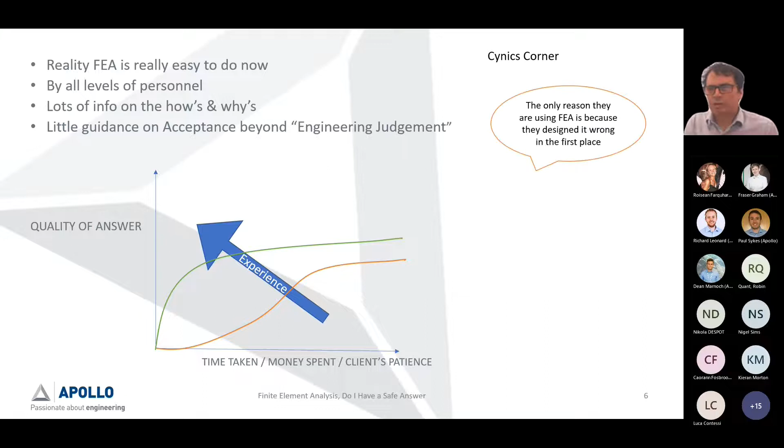FEA's got a bad reputation in some quarters - I call it cynic's corner - because sometimes if you're old school, you associate FEA with being hard and something you only do if you've got a problem, or something you've designed, put into service, and then gone 'oh, we're not very sure about this, let's do some FEA to reassure ourselves.'

The other classic statement is you never get a straight answer from an FEA man, because the FEA will raise more questions than answers. So if it's raising more questions, it takes more time, so it slows the whole process. Instead of doing a quick FEA to prove the answer, the FEA man comes back - have you thought about this? Have you thought about that? And everyone looks at you. That's really when the problems start.

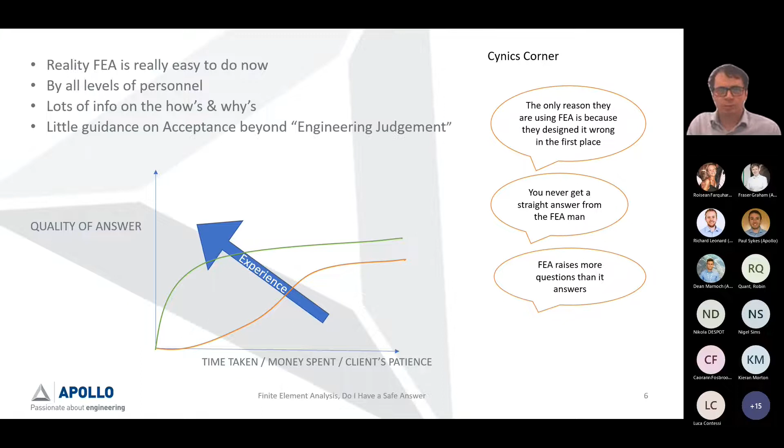So real life FEA now really consists of someone building a model, be it in Inventor, Creo, or SolidWorks, and either using the inbuilt package if they've got the professionals to do an FEA, or maybe passing the step file over to someone who's got one of the mainstream packages, converting it into a model. Then someone just says, okay, run it through the FEA package and tell us, is it safe to use? And there's your problem - how do we know it's safe to use?

I came up with a thought process to think about this. I'll take a little problem that's solvable by hand calculations, and then equate it to a little test model, and compare the FE and the hand calculations. I'm then going to take a few exploratory detours into some background stuff that helps understand why some limits are appropriate and why some aren't. Then I'm going to put my head on the block and suggest some limits that, if you're halfway sensible, you can live with, and no one's going to tell you off too much. Some people might disagree with my limits, but hey ho, you've got to put yourself out there.

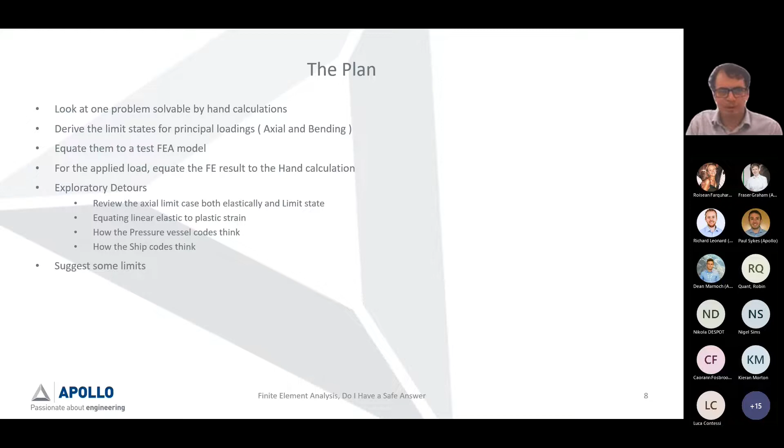So I'm making a basic assumption in this, in that I'm largely letting the software do its thing. I'm not worried about element choice. I'm not worried about meshing. I'm not thinking about the solution. All I'm doing is I built a model, brought it into Ansys, solved it.

And I think this is a valid assumption because I think that's how most people use these packages now. They don't want to burrow into 16,000 layers of click boxes, and remember to tick box X to do box Y. So that's what everyone's going with.

But the real important thing is you've got to think. You cannot blindly accept the FEA as it is. You have to think. You have to apply some common sense to what you're doing.

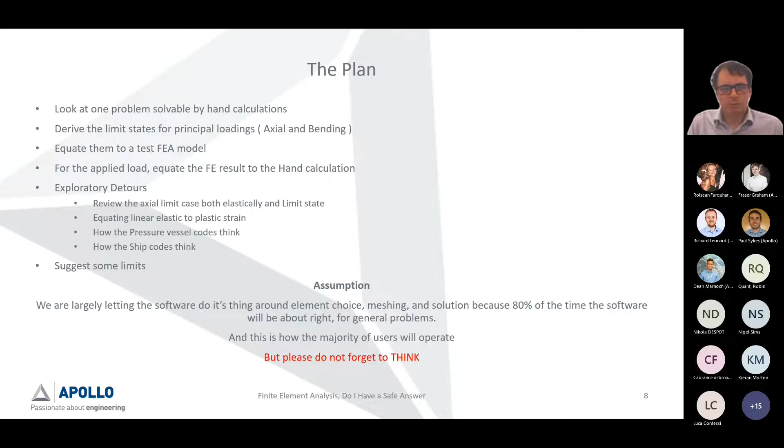So we're back to square one. How can we accept the results of an FEA? Even that question is open to interpretation.

What's the question? Are we confident that the loads we're using are accurate? If the loads are just a good guess, there's no point in doing a really top-notch FEA. You just want to know, are they there or thereabouts?

What design code do we need to assess against? If you're in aerospace, pressure vessels, or ships, you'll probably find very good, very detailed guidelines about what you need to do and what you can't do. But if you're in structures and just general mechanics, it's largely left to your own choices. So you have to work out what your limits are.

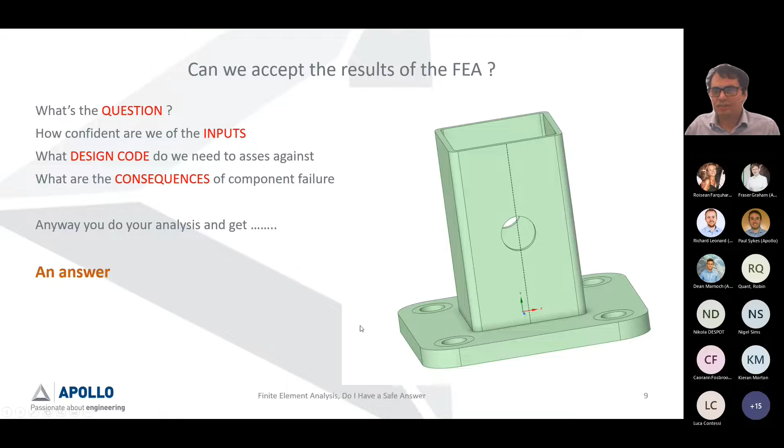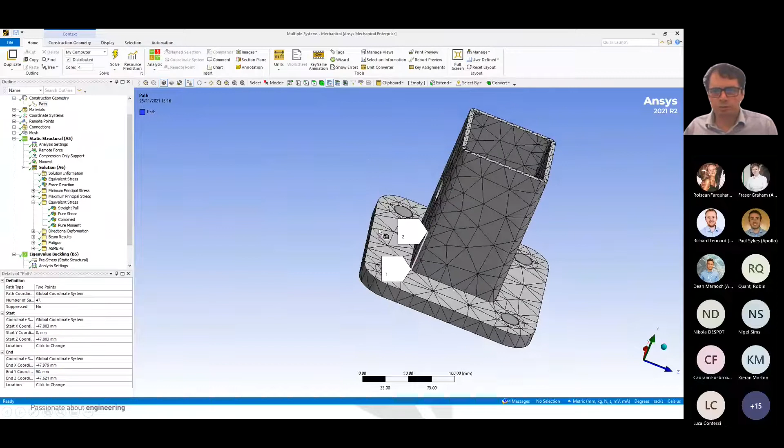For those of you who don't know Ansys, it's fairly straightforward. You bring your geometry in, you assign some materials, and you put some connections in. So what's my geometry?

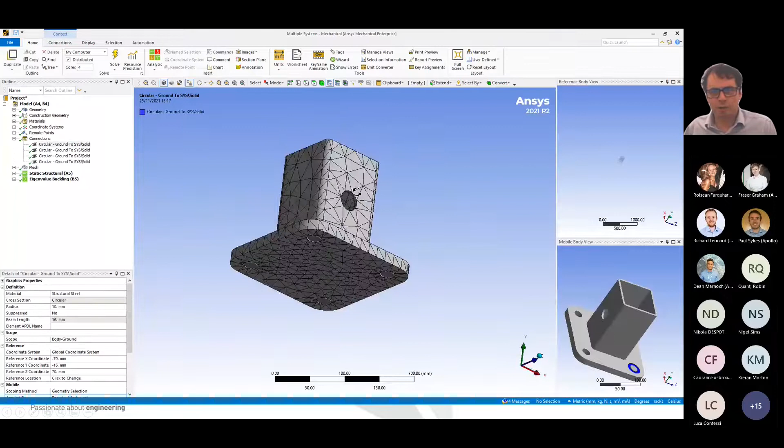In this case, I'm basically doing a bottom bracket of something that drops in, and here I've got a modeled bolted solution. So that's a wee bolt, and then we just tied the bolt to this area, and we've got 4 bolts. I'm not going to go into detail, this is just an experience thing of mine. This seems to be the nicest way. There's many ways you could hold this model.

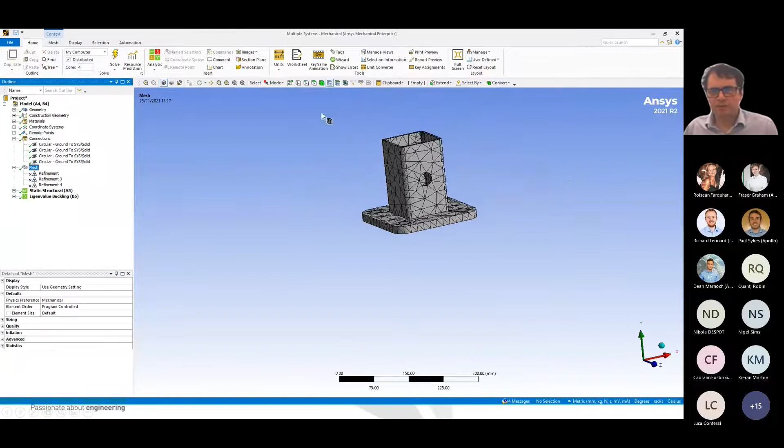You then get a mesh. This is Ansys's default mesh. If you just click mesh, that's what you get.

And then you need to apply some loads. You can see that I've applied the loads to this surface here, and I've got a few load cases. I've got a straight pull, I've got the shear loads, I've got a moment, you can't really see the little circle, and I've got a combined load.

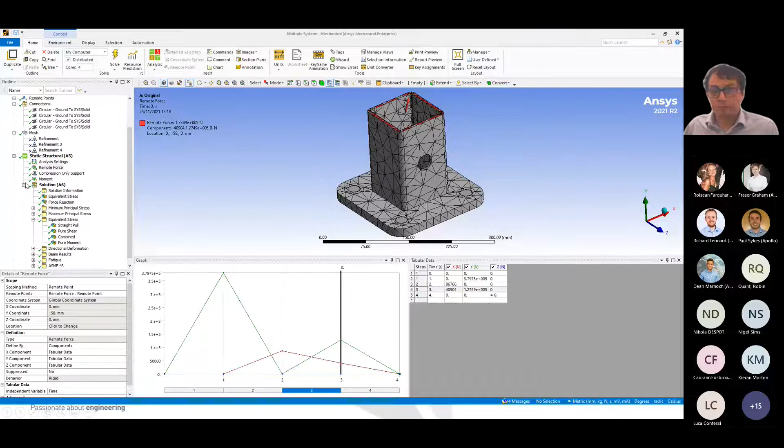So you apply all the loads, you get an answer. You solve it... and it's the wrong picture. So you solve it, and get rid of this. Okay, and you get an answer.

Now, the question is, do we know? The question I'm asking myself is, how do we know it's safe? The first thing you notice is, well, actually, maybe you would think that we're going to assume it's 355 steel, therefore yield is probably a sensible limit. So we could set that limit to yield.

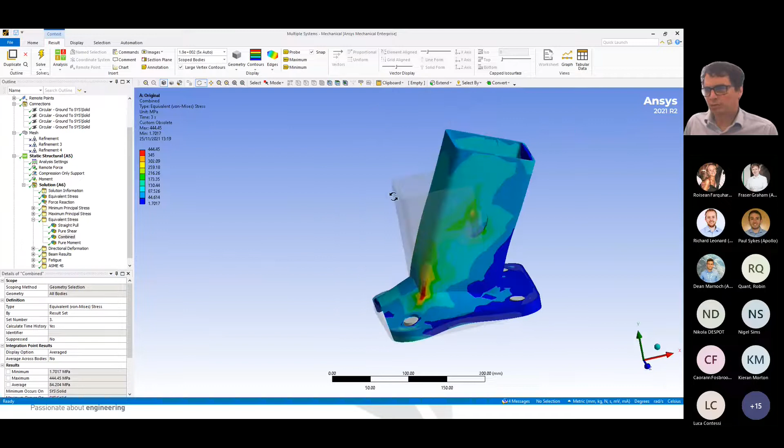So we've got some areas that are close to yield here, and we've got some obvious fails here, and you can see that I've put big excessive deformation on, and you can see that as a bending moment comes on, it's trying to bend it and rip it apart. This is all looking quite sensible.

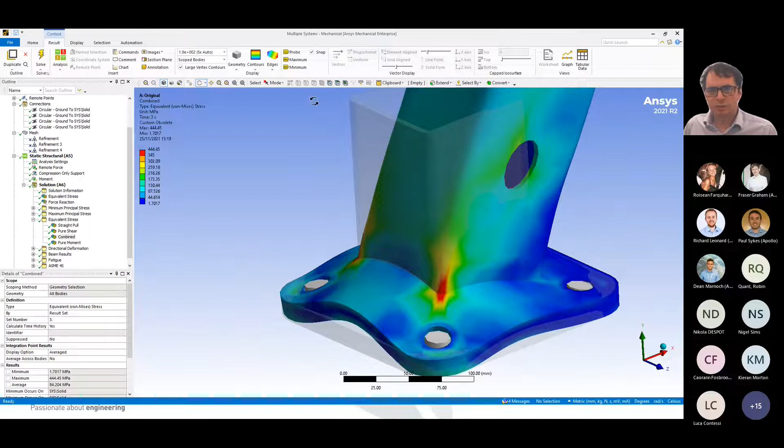You'll notice that how you present the results makes a difference. Quite often people see these nice blended plots. I don't really like them, because what you get is a blended plot, and crucially, this is very subtle, most software displays an average solution.

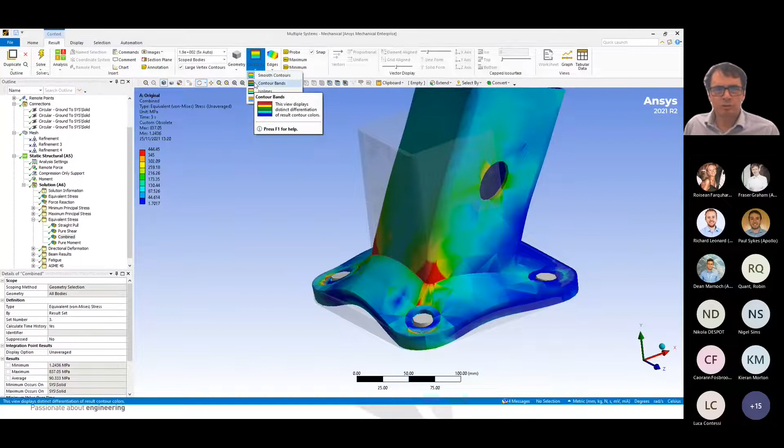And if I change that display to unaveraged and then reevaluate it, you can start seeing the picture is not quite so pretty. You see all these step joints, and then if we take the contours and put it to a bit more of that, you can see the elements, and you can see that the stress is jumping radically from element to element.

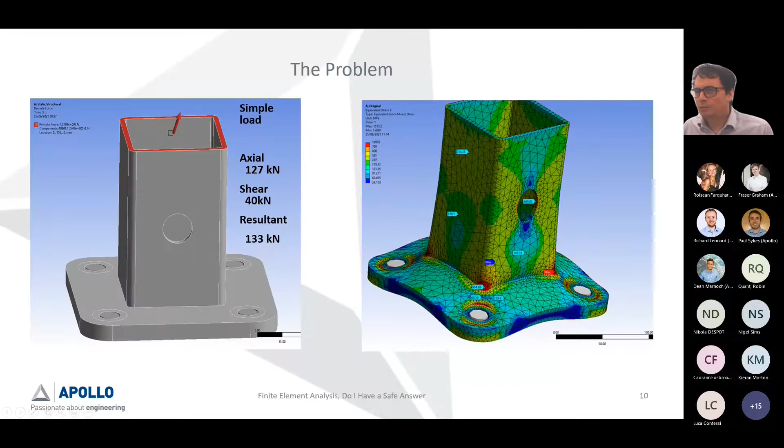So in my first pass, I'm not so comfortable with this mesh, so we'll throw away this model, bring in and put another mesh on, and you get a much nicer, much more complete picture.

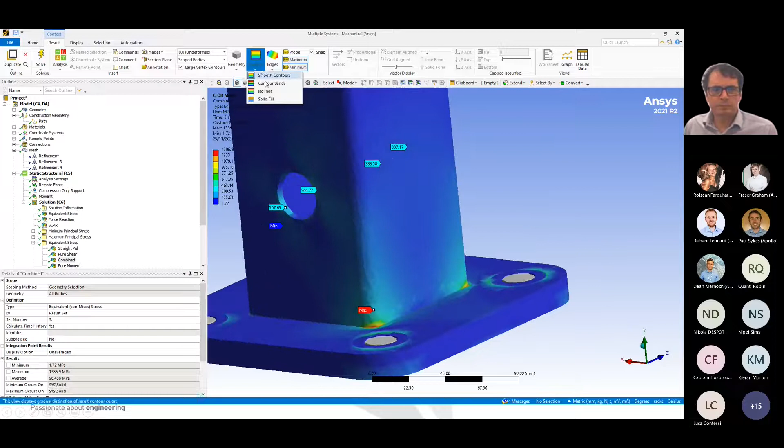Okay, and contours, put contour bands on. Again, I've got unaveraged plots now, but this time if you look at the mesh, you can see the bands are crossing the elements quite nicely. There's some glitchiness here, but that's probably livable with, and that's just down to the way I've held this pin.

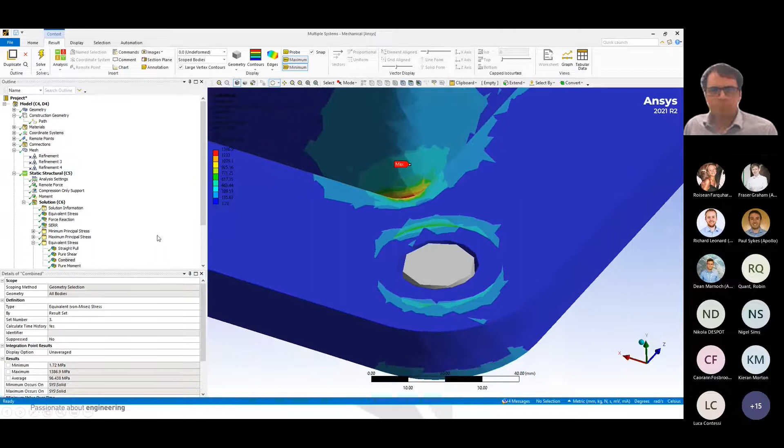But you can see that the maximum stress has shot up. It's now 1300 odd, so there's something squiffy going on.

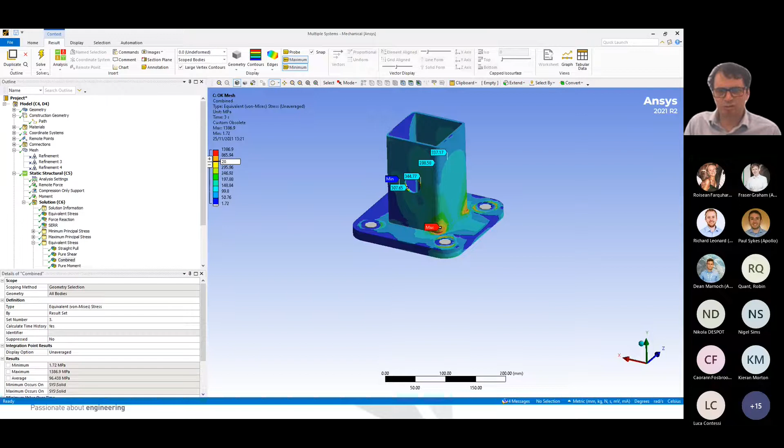But again, I might put a limit of 345 on, which is yield. But if you're a structural engineer, you're probably thinking of 0.6 of yield, so maybe your limit would be 207 or something like that. And then basically you say, oh, everything that's orange has failed, and you're like, oh dear, this doesn't work.

So are we happy or are we not happy? Now, if we go back, we can go and do some hand calculations. It's just a hollow tube with a hole in it tied to a base. You can do a sum and work out the bolt load, and you can work out how thick the plate needs to be.

The important thing to notice is for axial, the AISC codes - I'm using AISC because it's freely available and easier to read cold - they split into axial and moment, and apply different limits for different things. So at the base, for simple axial, it's just the allowable yield stress times the area of the section divided by a factor of safety. In this case, it's 1.67, which equates to the classic 0.6 yield.

And at the hole it does something slightly different. It says that it takes the yield stress times the net area and divides it by a different safety factor, so actually a factor of safety of 2 against yield. So what they're saying, by talking about yield, is essentially ultimate - it's probably thinking about bending and plasticity happening.

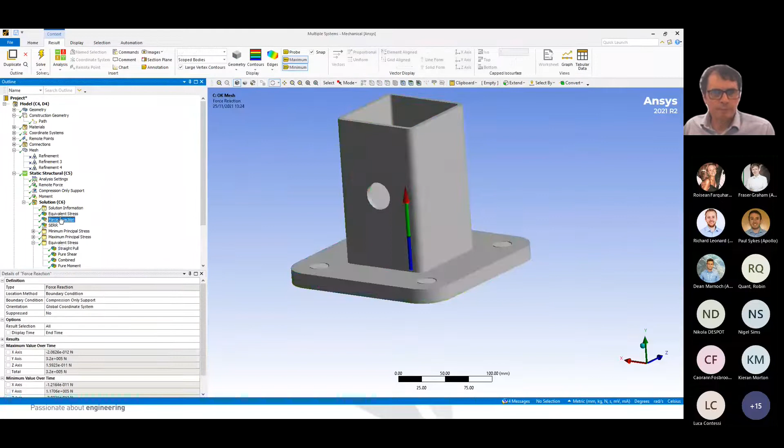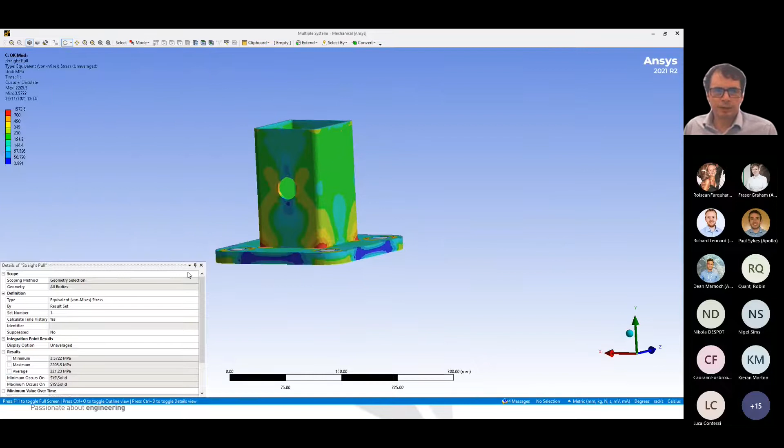So if I go here and put on this remote force - let's check I put the right numbers on. Sorry, I've lost a remote force. So there we are, I put 380 axial force on, and then we look at the result. Make that bigger - so we know that this is a pure axial load, 380 kilonewtons.

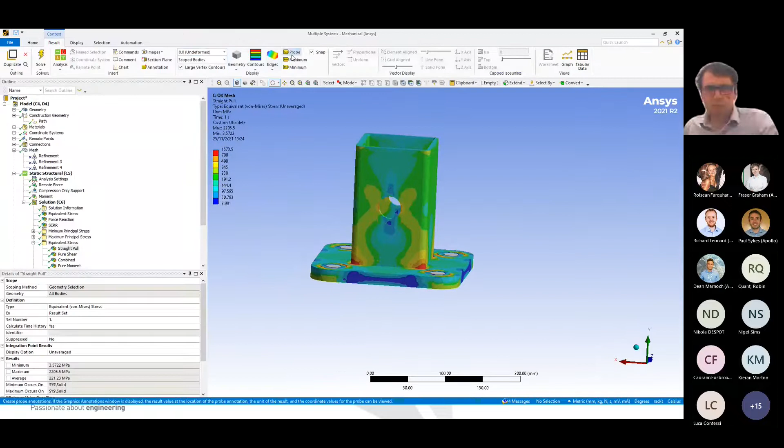And then we look at the stresses we've got in the model, and I've been quite careful here, so I should be able to probe it. Hopefully everyone can see this. And you can see that on the back, in there, it's 216 MPa, which feels about right, and that is just your average stress across the section.

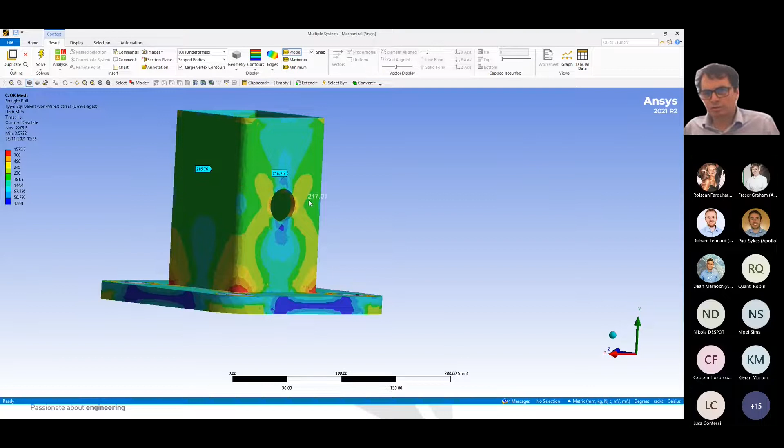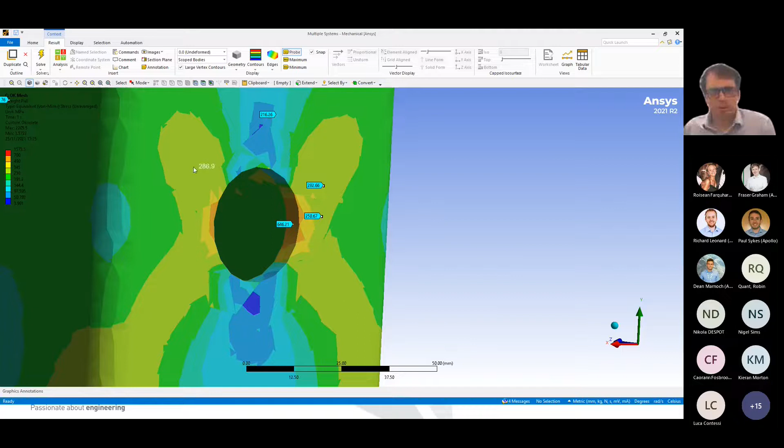But round here where we've got the hole, and that was our net section property, we can see that we've actually got stresses way, way, way higher than yield. And even here you can see something there - 266. But again, it's still less than yield. And then you have this zone around the thing.

And down at the bottom here, you've got these massive numbers - you're up at 2000 MPa. So, no. But it's one of these ones, if you did the code check, you would just check that if you did this by hand, you'd say that's fine and move on, not get too worried. So here we've got the classic problem of FE - it's throwing up two areas of slight concern.

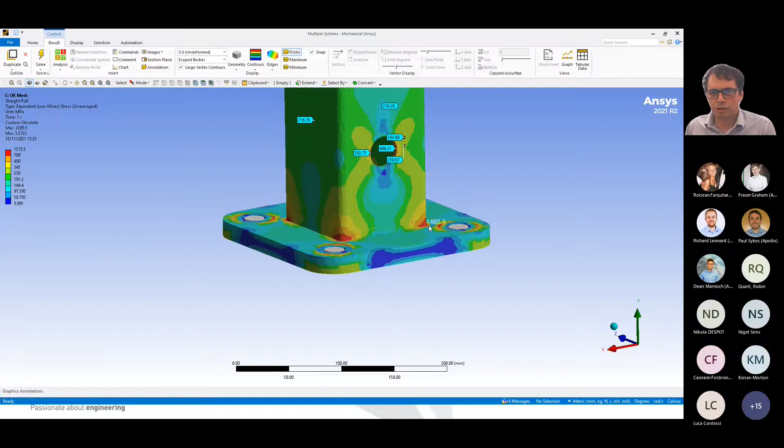Yeah, and you can do the same for a moment. Now what I did do is I just went back to my model.

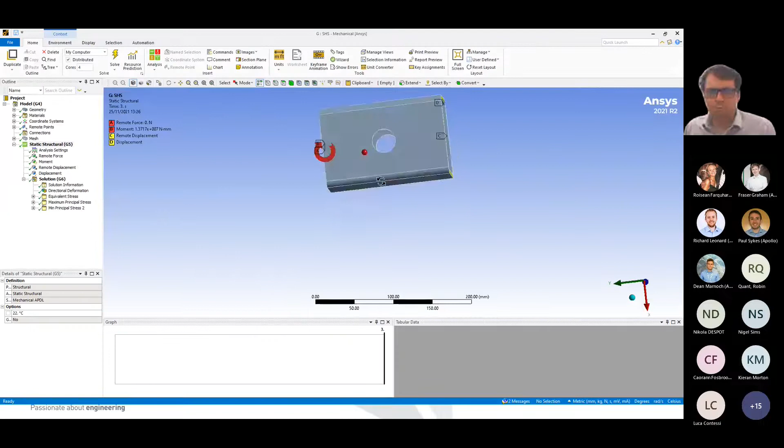You can see that I've built a very simple tube, and I've got a straight axial force in there, and then I put the design moments on in two directions. So one's in plane, and then the other goes the other way.

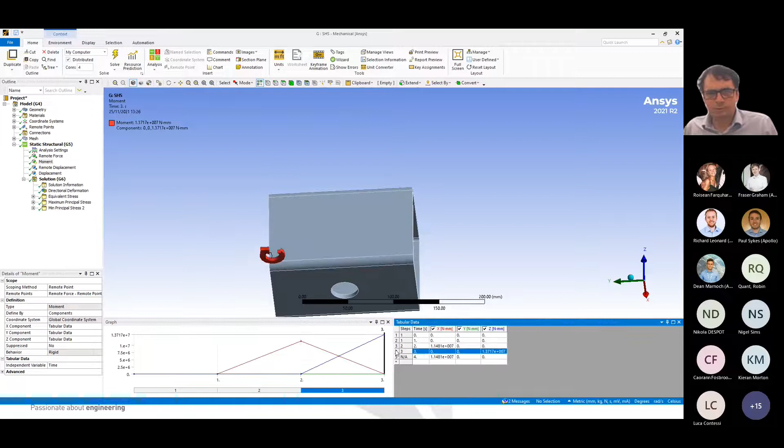You can see what's happening. You end up there. So again, these are the limits, so you can see that. I'll distort the results so you can see what's happening.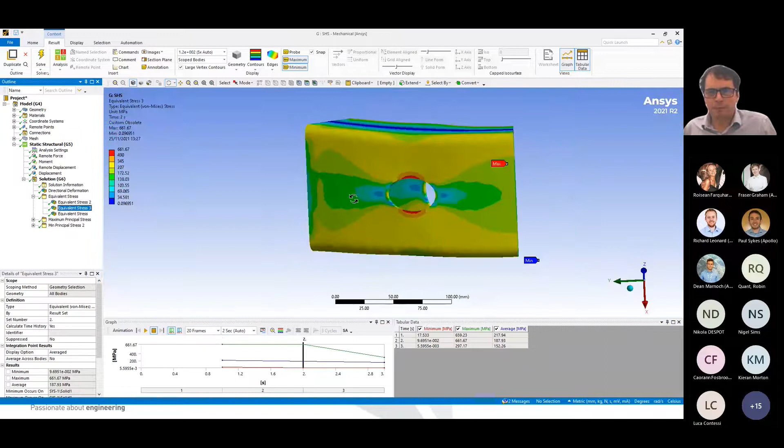You see that there's virtually no stress in the middle, and you get tension and compression here. Again you've got the stress concentration in and about the center, around 600, which if you think about it, your mean stress is somewhere around 200.

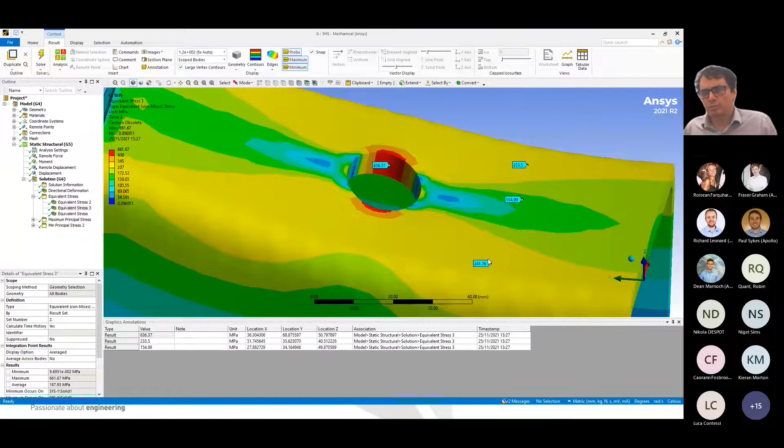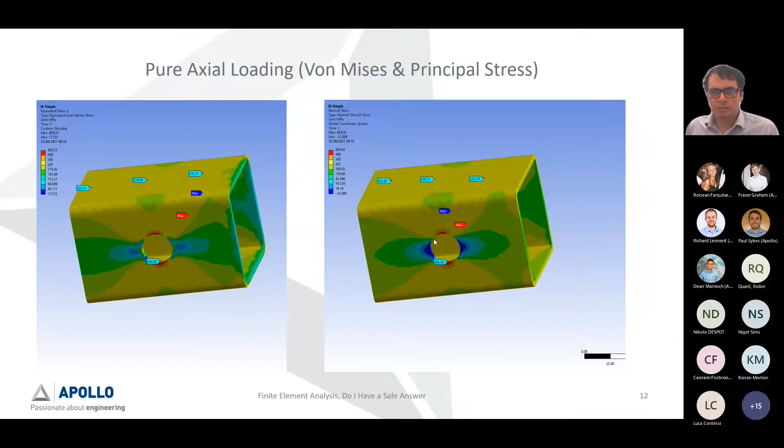It's a hole, you're going to get stress concentration, and you can do the same back to front. So clearly the AISC design codes allow you to go to much higher numbers than you would immediately assess.

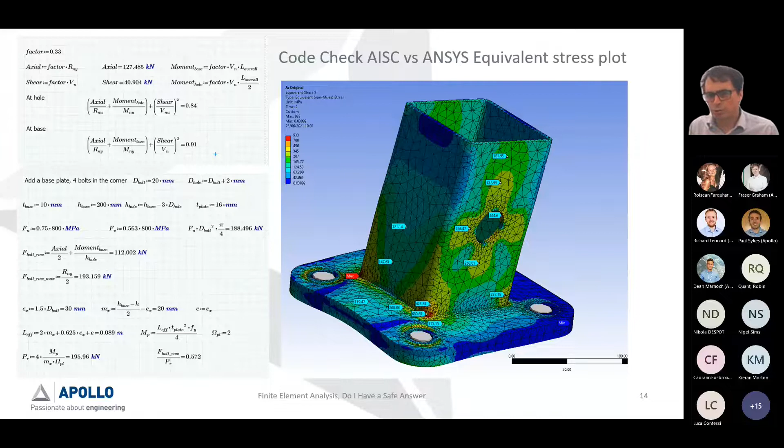I'm going to skip over this for time, but you can check that this is what happened. So I applied a combined load and I end up thinking my stress utilization was about 80 to 90% by code, and my bolts are 50% loaded, so we're okay here. If I did a hand calc, I would almost have accepted this structure without thought, for the given load conditions.

So I go back to this one, back to the straight pull. Display, sorry, I'm mucking around with my contour. Get into ISO mode.

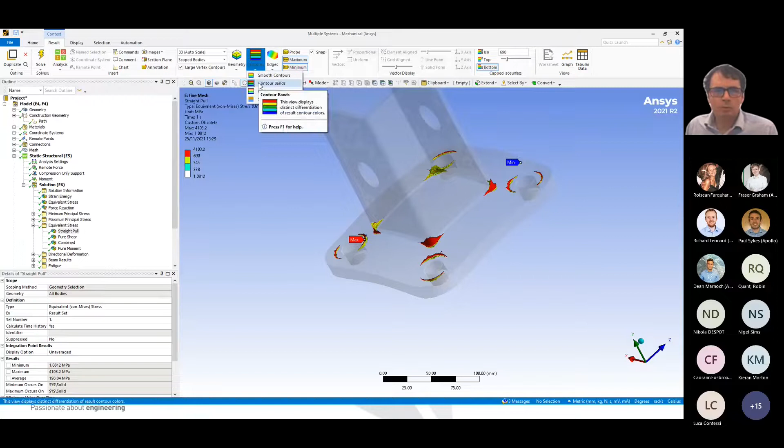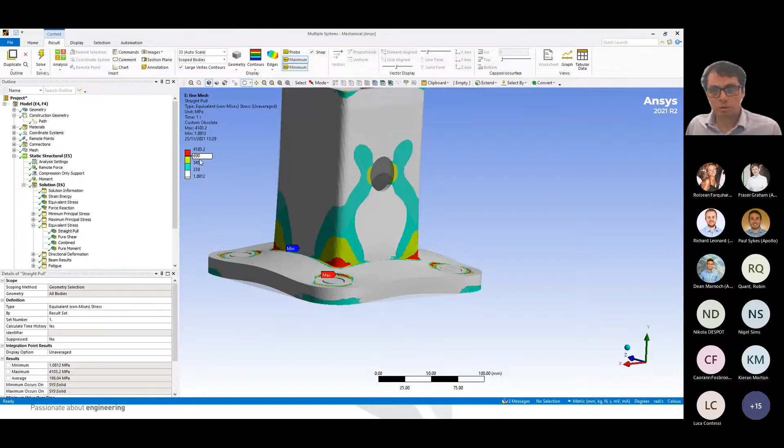Right, I've simplified the plot a lot here. 238 is two-thirds of yield, 345 is yield, 690 is twice yield, and 4,100 is the maximum stress.

So you've always got to be a bit careful, because people hide these and then they just say, 'Oh, it's a stress concentration, we can live with it.'

So that's what it looks like, and you can see there's nothing much happening inside, and the pattern's the same inside. I'm making notes, I'm just assuming this is a solid welded lump, I'm not going to go into any details.

So what you're saying is the average stress away from any discontinuity is 215 MPa, and that equates to two-thirds of yield, or 0.6. We seem to have a stress concentration here of 3, about 3 times the nominal stress.

Looking good. In the corner we've got very high stresses, but I'm going to show you something in a minute. This is a classic example of something we didn't even think about in the hand calc—they just worked out the average stress in the weld and lived with it.

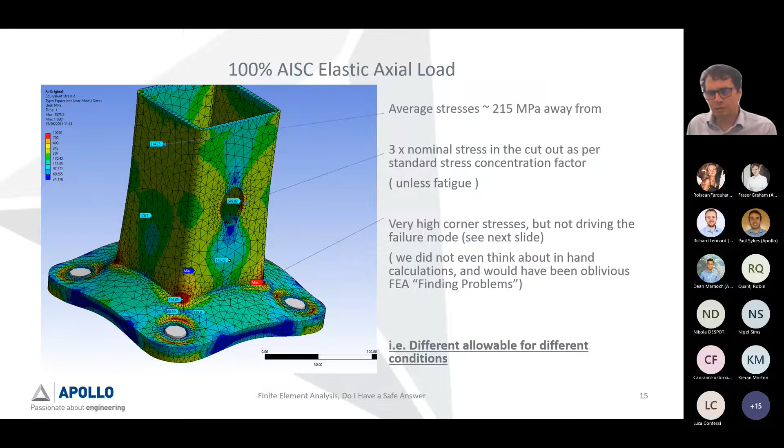So this falls into the findings category. But the important thing is for different areas in the model, we're going to apply different limits. So here we apply one limit, around here another limit, and around here another. You just need to understand that the limits are dependent on the type of loading and the geometry.

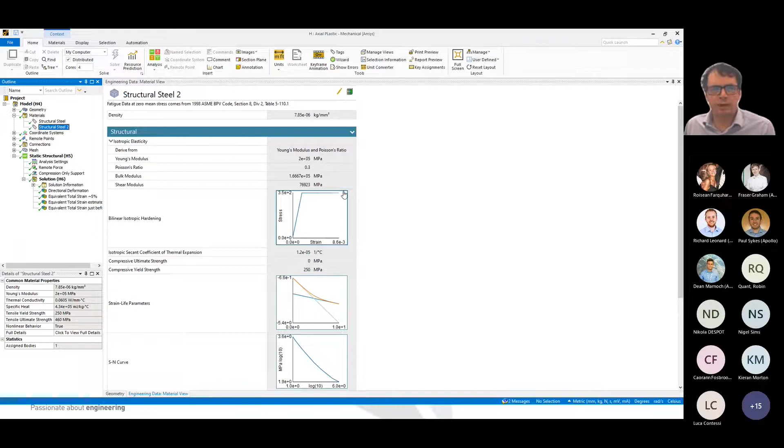So because I had time, I did an elastoplastic analysis. What I did here was apply some material properties—you probably can't see it very much, but it's basically a perfect curve: it ramps up to yield and then goes flat beyond yield. We applied the same loading, and then you can get the results.

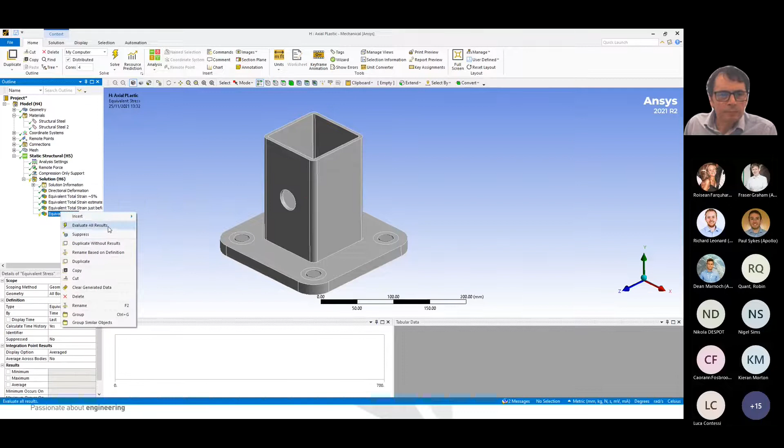So to insert, I need to insert a stress plot. The important thing to realize is what happens in an elastoplastic analysis: as the time goes up, in this case the bottom is time or load, it behaves linear, linear, linear, and then it starts to bend. At this point, somewhere around here, the structure started to fail.

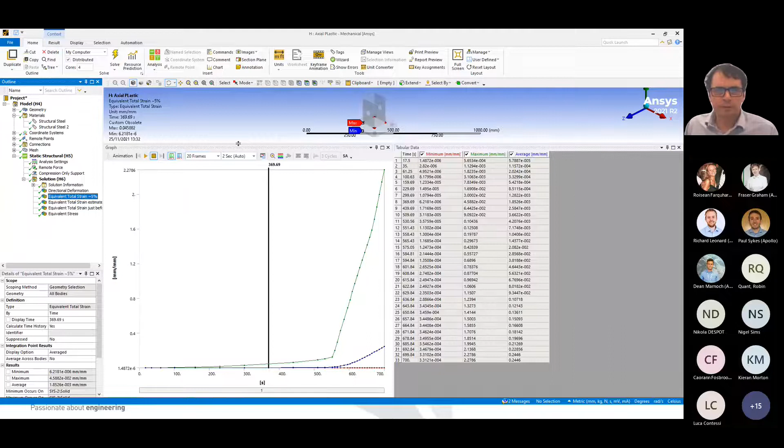So I've got some plots out. What's happened there?

So this is the total strain just before plots, and I've changed the top so that these are—that's like 10%, 20%, that's 5%, 2%, 1%.

You can see just before yield, so the time equals 538, 530. And then what we're saying—you can just see, this is 551, which I estimate to be the point where it's failing—you can see the strains are starting to tick over 5%.

I never probed that. So, you can see that it just stretches.

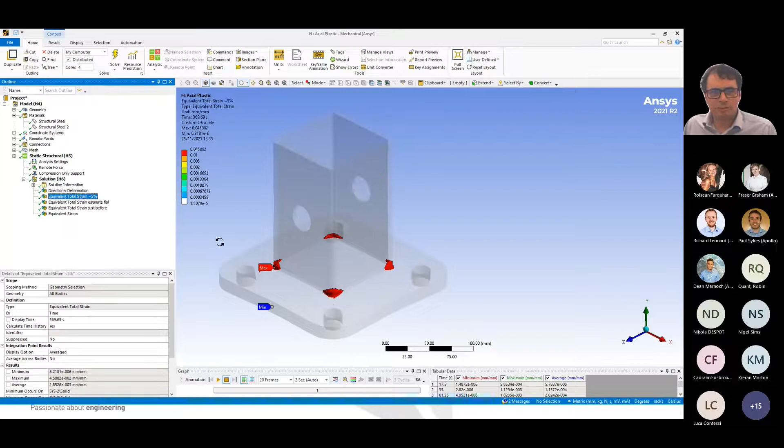But what you can see is that yes, you've got quite a lot of strain here. And if I do that, so we'll just leave that, and then we can go back to here.

Now, if you do a similar plot, this is the strain plot just as yield, and you can see how it's going to fail. It's failing in a manner you'd expect. It's just ripping it out from the holes.

But interestingly, the actual complete collapse, the complete plastic hinges formed around this area, not in the region of the corners. So all we've done here is saying that...

It stretches, and there's a simple trick: you just project a couple of straight lines, and where they meet here, 550 kilonewtons, that's pretty much the breaking load. And then to get a design limit, you just divide it by 1.5 or maybe 1.67.

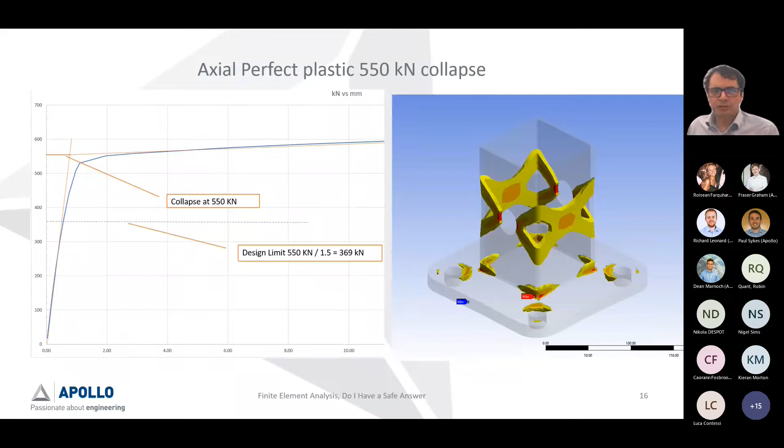And then if you go back a couple of slides, you remember that the maximum axial loads from AISC was about 580. So I'm just going to take a couple of detours now, punch us a wee bit, and look at how some other places do it.

The most comprehensive guidelines are actually written by the pressure vessel codes, probably because pressure vessels blow up spectacularly and they're expensive to make. So there's a real interest in making them leaner and safer.

The crucial idea is that the pressure vessel codes define two basic types of stress: a primary stress and a secondary stress. Primary is best defined as, if you keep increasing the load, there's only one thing that's going to happen, it's going to blow up. So a primary load would be pressure, so you pump up the pressure, things break.

And a secondary load, what you're saying is something's going to bend. Heat's a classic one, or displacements. If you push something, you rely on the fact that the metal just absorbs the energy and bends a wee bit.

And then they also consider peak. Now they apply three different loads to them. So the primary stresses, if it's just general membrane, it's S. Now S in this case is 2/3 of yield.

Now what you're saying is you're allowed some local membrane stress, which is allowing for some discontinuities, but it's allowing for shape discontinuities, not concentrations. And it applies a limit of 1.5S, which in this case would be yield.

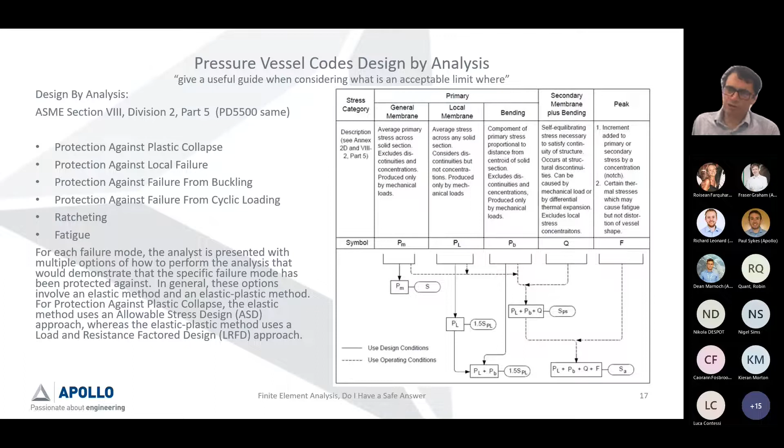And then for peak stress, it says you have to think harder and consider fatigue. So you can do this by load factor design or allowable stress design. They give you guidelines for both. And PD 5500 is much the same.

Ship rules are another area where they do it. But the interesting thing is the meshes - you can imagine the model's 100, boat's 100 meters long, your meshes are actually very coarse, so 500. But they define a coarse mesh, they define a fine mesh, and they define a very local mesh for fatigue, giving different limits for each.

The interesting thing is to see that they have a static and dynamic case. So for static loads only, you like to go to 0.8 of yield, and for dynamic, you can go up towards yield. And then when you look at fine, if they go down to a finer mesh, they're getting much higher.

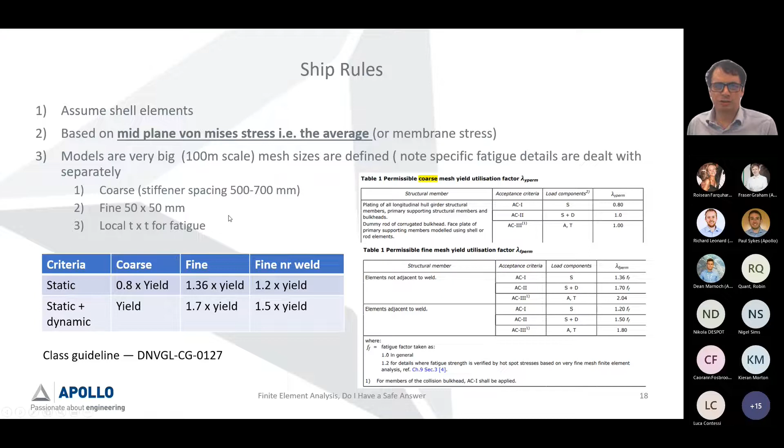So it's just to say that we're not being outrageous by considering that elastic analysis above yield is acceptable. The structural codes are vague, to say the least. They assume that everything's based on capacity.

So they actually inherently allow for plasticity, and you'll see it because they always define the bending moment in terms of the plastic section modulus. So it's inherent in the codes, and you can see it, and 9 times out of 10, you'll see it as if they define an ultimate limit and then divide it by a factor. But they also have a pile of rules in there just to protect you from yourself, mainly to do with buckling and shape factors, etc.

For elastic and finite element analysis, AISC doesn't say very much, but you sort of get the impression that 5% is an implied limit, and Eurocode explicitly states that 5% is an allowable plastic strain based on a load factor. But you have to remember that that's based on a factored load, and the factored loads are about 1.5.

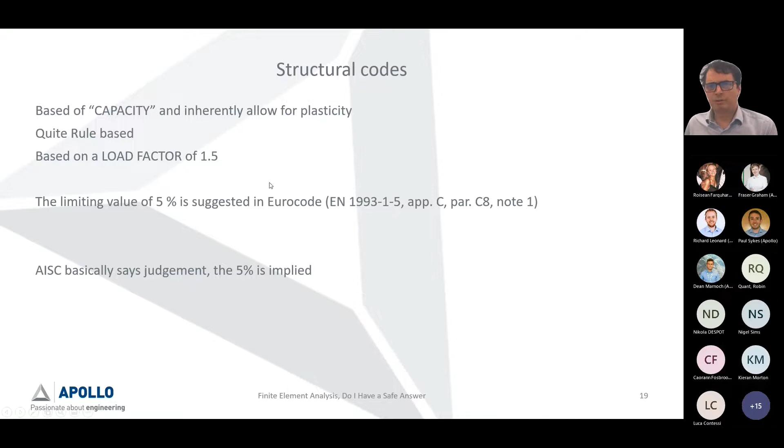Now there's a quick trick called Neuber, and it allows you to equate elastic results to plastic results, and it's a simple area under the curve trick. Stress times strain is energy, so the energy in the elastic model, which is linear, equates to the energy under a given stress strain curve. And then, if you have a little play with that.

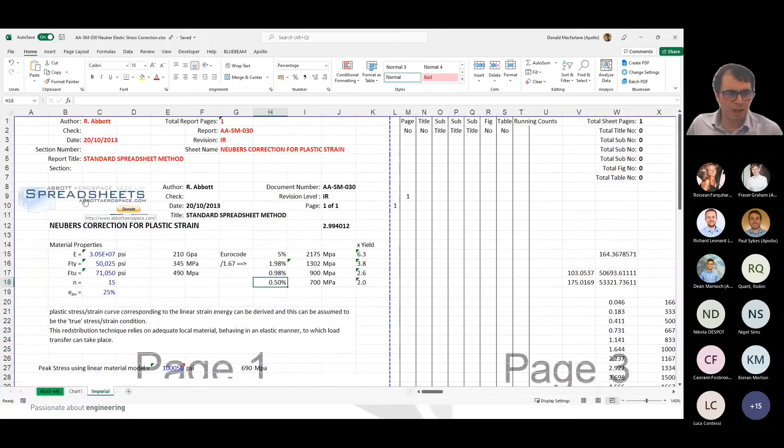Like that. Okay, and here's a little program. You can download this free from these guys, Abbott Aerospace Spreadsheets. Because it's American, it's in PSI units, etc., etc.

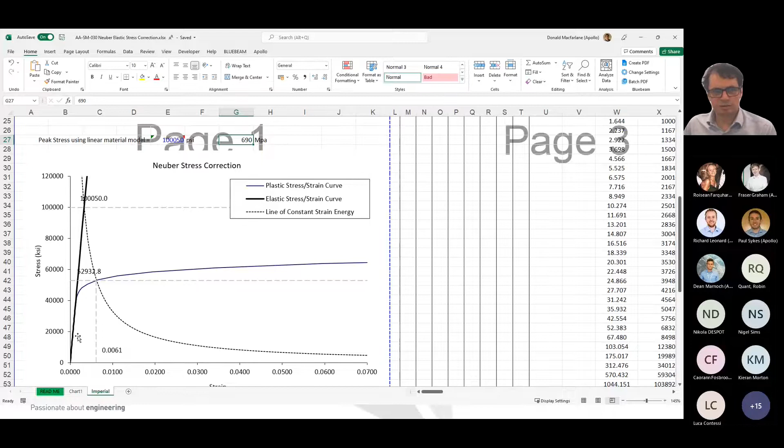So what you do is you enter in your peak stress, and it works out. So there's your peak elastic stress, and there's your plastic, elastoplastic true stress strain curve, and it gives you the stress you may expect. But crucially, it also tells you what the strain is.

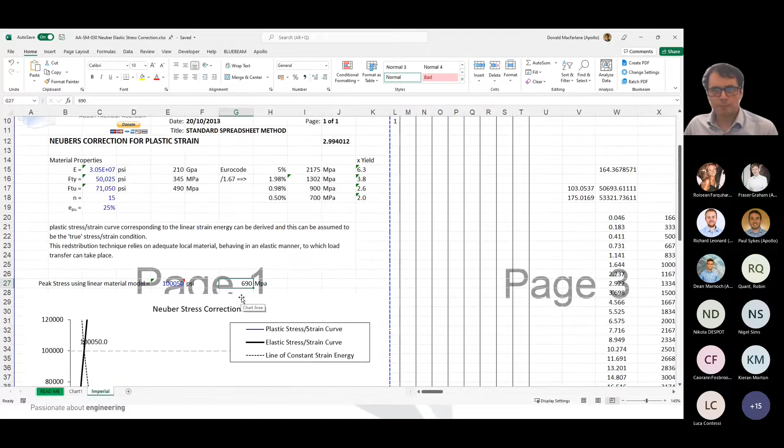Now, if you have a wee play, you can derive some limits that become applicable. If you did a full elastoplastic analysis in Eurocode, you would say 5%, and that equates to a stress of 2,175, which would scare anyone for something so simple.

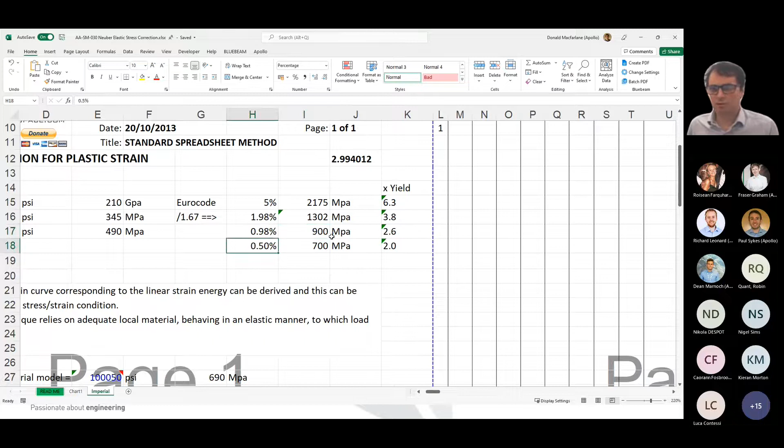And if we were to say that we're going to apply a 1.67 safety factor and do a working stress design, you might think that 1,300, i.e., you end up with an allowable stress of about 2% plastic strain, which is 1,300. And then you can figure out that 1% is about 900 MPa and 0.5% is sort of 600 or 700. So these are starting to throw up some ideas.

Now, for the final, on the back of the plastic elastic thing, this is quite a confusing curve, and what you normally do is if you're doing a weld design or hotspot, you do a technique called hotspotting. I'll have to explain what's happening here.

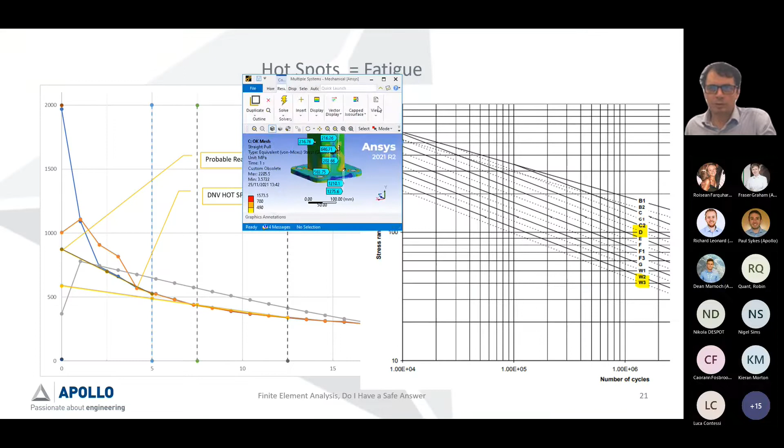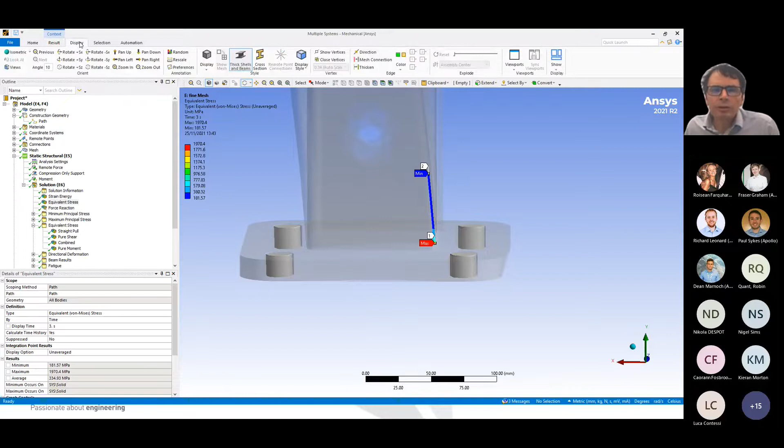This picture here. And if we take this model here, display. Okay, what I did here.

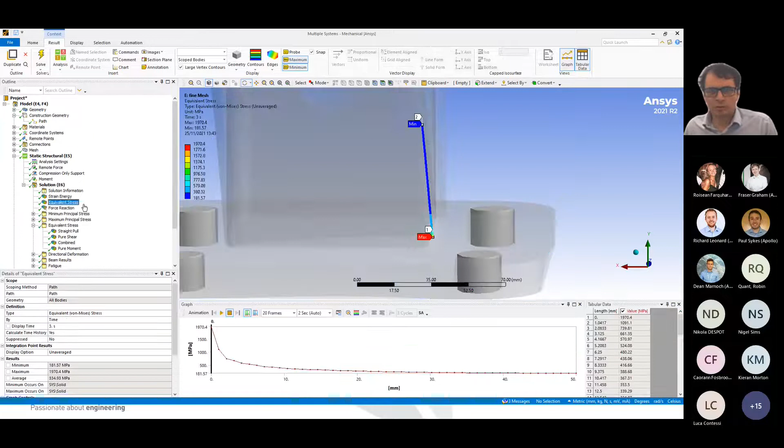If I put that into our combined plot, we have our stresses increasing along here. So I drew a little line along here, and I've recorded the stresses on it. And you can see that the closer they are to the intersection, the higher the stresses get. And I've done this for 3 models.

And if you were to refine the mesh even more, this stress would just go up and up. And that's the classic definition of stress concentration.

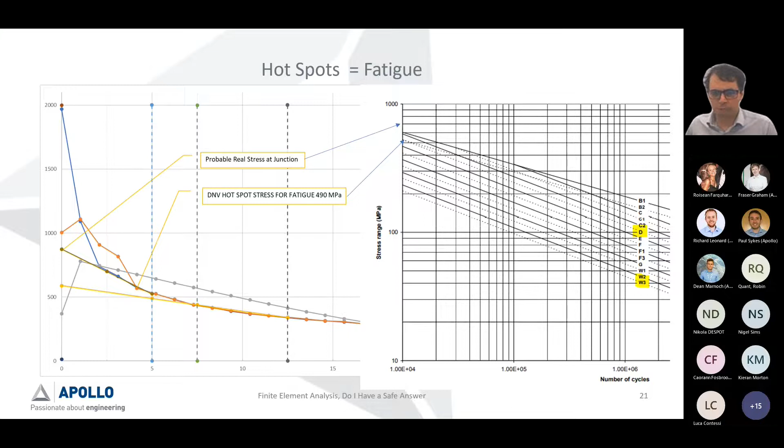So, they're big old numbers, and probably the real stress at the junction is somewhere in the region of 800 MPa. But that's very unlikely because in reality there will always be some form of stress relief. There'll be a little thing.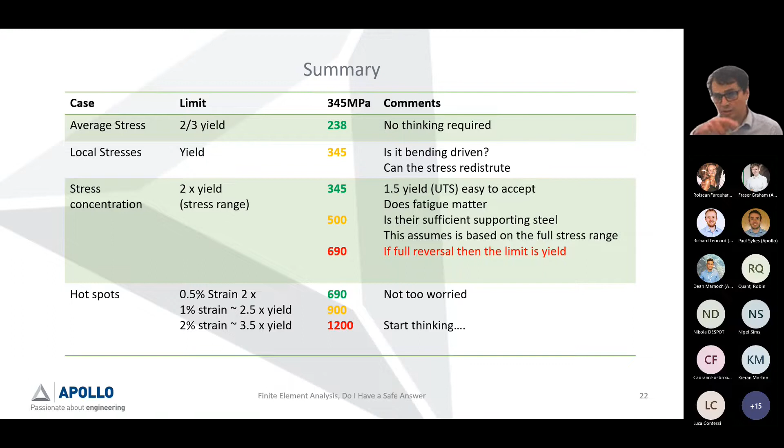Apologies, it's been a rattle through, but at the end of the day, I have a set of limits in my head which I use to assess things. Hopefully my chat will have explained why I got to them. You can think of it as increasing difficulty and increasing thought process. So the first limit: if the average stress in the model - note the word average, so it's allowing you to be a bit peaky - is less than, say, 2/3 yield, you can accept the answer, no thinking required.

Local stresses, now you can accept the limit of yield, so you have to think a wee bit more about that. If the whole body was purely axial loaded to yield, then that's a fail. But if the loading is driven by bending on the tension and compression surfaces, you can probably accept yield. What you need to make sure is that the inherent allowance is that the stress can redistribute - as the outside surface bends, there's a spring core.

So with a wee bit of thinking, you can accept 345 yield for local stresses. Life gets a bit more complicated around stress concentrations - I call them that, but it's probably not the right word, better off as geometric discontinuities. I think I should change that word. For these, I use a limit of twice yield before I get really too worried.

But there's a very important caveat on that, because what the twice yield limit assumes is that on the first application of loading some yielding happens, and thereon after the object behaves in a regular fashion - so I put in brackets stress range. The best way to think of it is if you can show that the stress range of an object is less than twice yield, then chances are it's going to be good for infinite life.

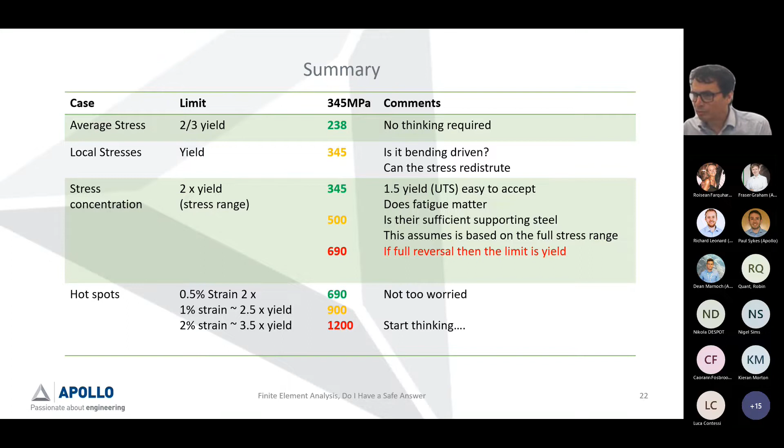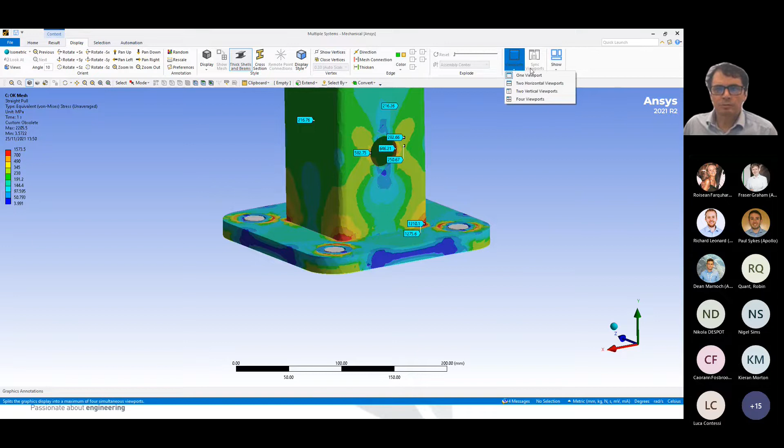So if we go back to our model, which we've already decided by hand calcs - because we're good engineers and we did hand calculations - yeah, so we go back to our combined load case.

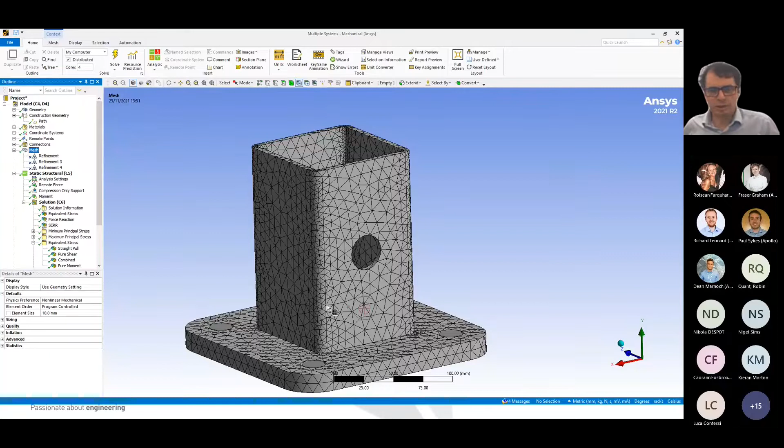Let's have a look at our mesh. The mesh seems okay - this mesh is basically a 10mm mesh, but I did switch Ansys to work in non-linear mode just to make it right. So let's look at our combined thing. We've now got some limits.

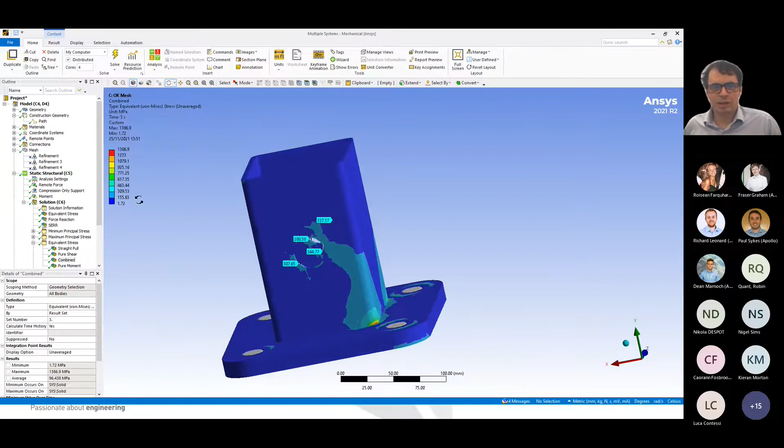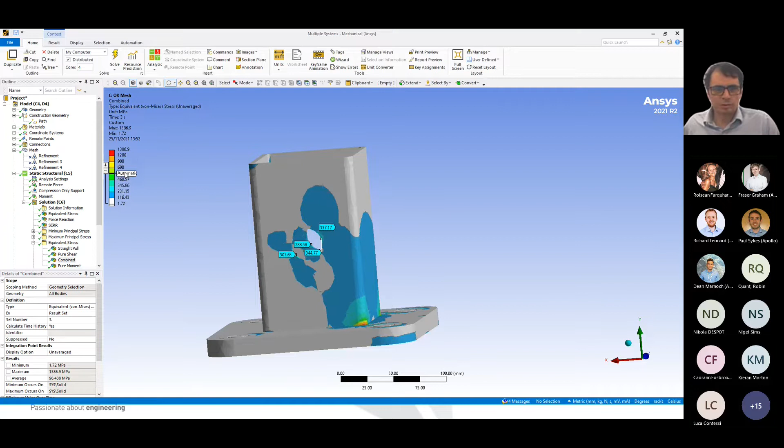1300. Oops, so just let's refresh this, just to see. The beauty of FE is you can make any plot look good - a nice trick is to make the blue go. So looking at that plot, you wouldn't think it's too bad, but actually...

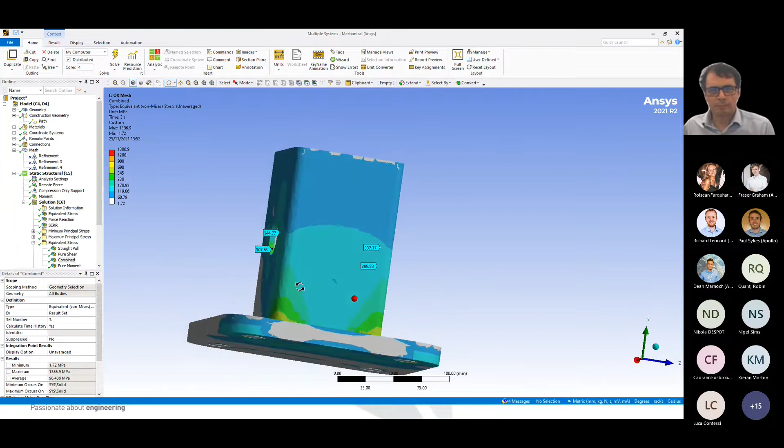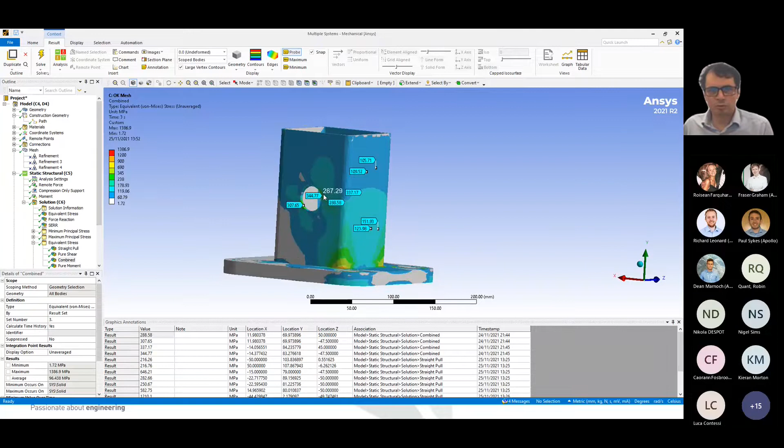I've now just applied what I think are our sensible limits. Away from any discontinuities, in an area of average stress, if I put a hit result, we can probe the numbers. 120, not worried at all. Round the hole, it's still okay. We've got 300 there, 345 there, but there's lots of metal around it, so we're at a yield limit, so I think we can accept that.

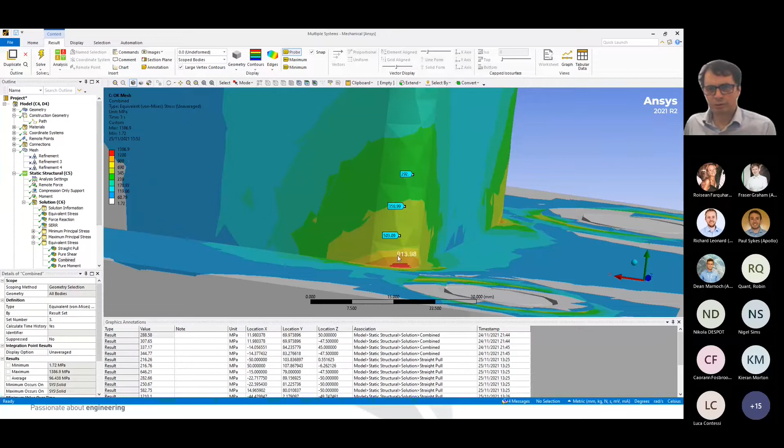Down here, you can see it's 290, 500, so we're starting to get into the area we've already discussed - if things are within 5 millimeters of this edge, these numbers we can largely ignore. They're totally driven by hotspots.

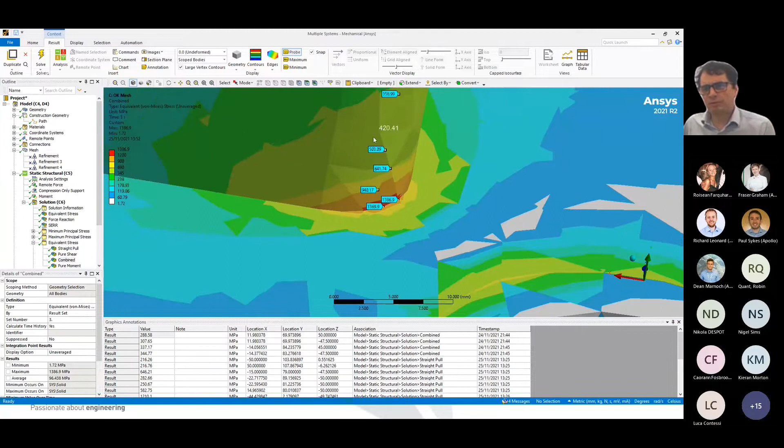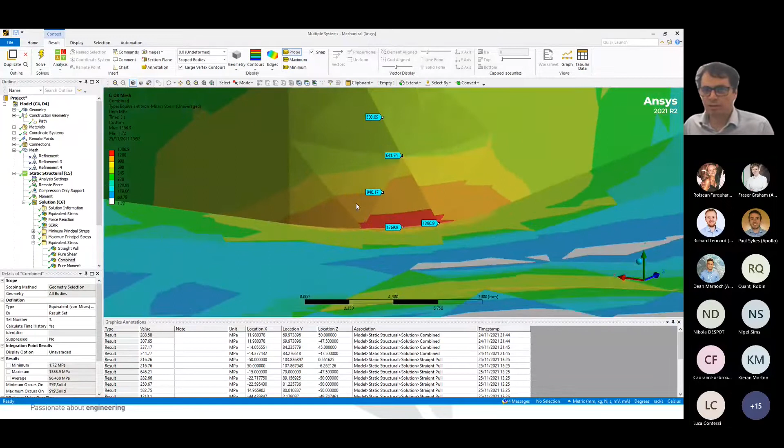So the acceptance question is: are we happy with 500 odd here? This now becomes a case where I think we can apply our stress range - say it's less than 600 MPa. So I think we're good to go, and we can justify that as a high stress hotspot. You need to think about it for fatigue, and I would strongly suggest if this unit was subject to fatigue, it would break, but we're not worried about that in this case.

So that is all I was going to say. I could say a lot more. So thank you for listening. I hope I've not bored you too much. That's been a long hour.